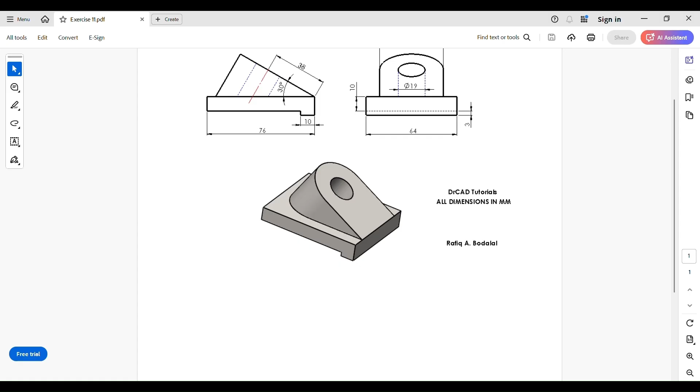We start by creating a new SolidWorks part. We copy exercise number 11 into SolidWorks, and we set the background to plain white.

The image shows the isometric view, a front view, and a side view of exercise number 11. The easiest way to model this component is in 3 main steps. Step 1 is to sketch the profile of the base, then use the extruded boss base feature to create the thickness of the base component.

Step 2, and this is the tricky part, is to sketch this slanted surface. To do that, we need to create a new SolidWorks drawing plane that is independent of the 3 drawing planes we get whenever we initiate a new SolidWorks component - the front plane, top plane, and right plane. So in this tutorial, we're going to learn how to create a new SolidWorks drawing plane.

Finally, step 3 is to create this hole. Of course, we're going to use the extrude cut feature for that.

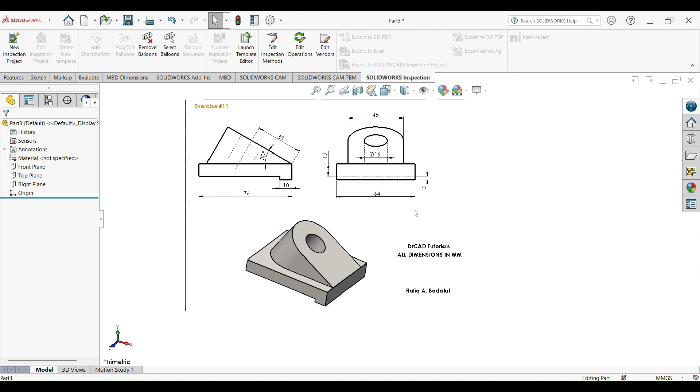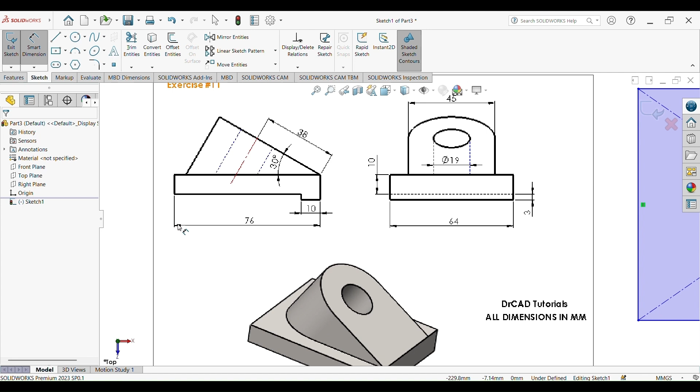So let's get started. We select top plane, sketch, and start by sketching the base profile. We go to center rectangle and draw one rectangle. We go to Smart Dimension - looking at the figure, the rectangle should be 76 millimeters long and 64 millimeters wide. So this side is 76 millimeters, while this side is 64 millimeters.

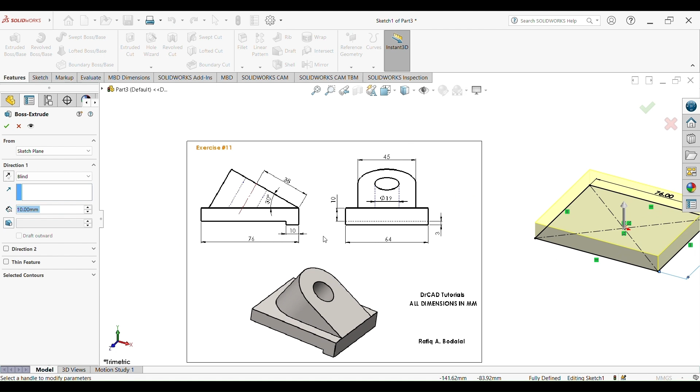Go to Features, Extruded Boss Base, and we extrude this to a height of 10 millimeters. This base should have a thickness or height of 10 millimeters. Select OK.

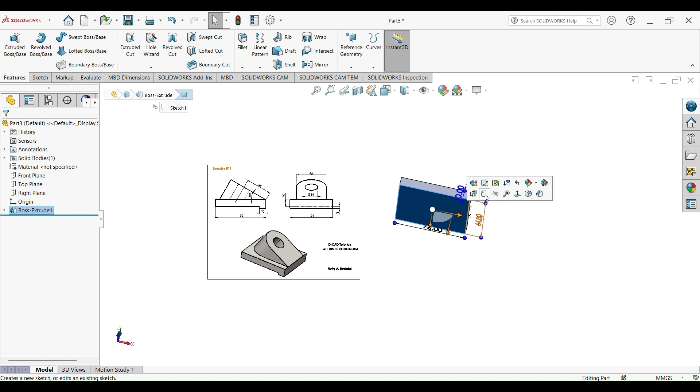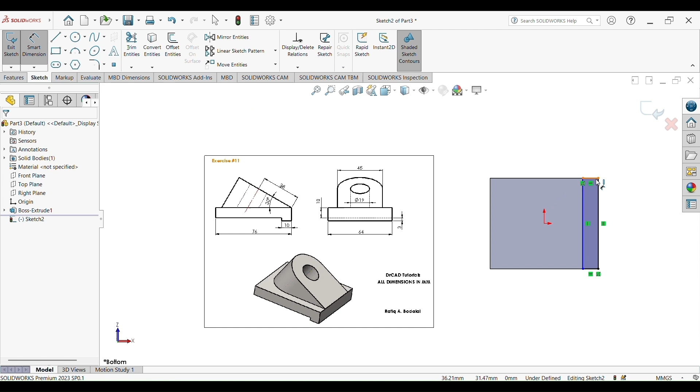Now we're going to work on this stepped edge. Select the bottom surface, sketch, go to corner rectangle, and draw one corner rectangle. Looking at the figure, this rectangle has a width of 10 millimeters. Go to Smart Dimensions, and this edge should have a thickness of 10 millimeters. Now go to Features, Extruded Boss Base, and extrude this to a thickness of 3 millimeters.

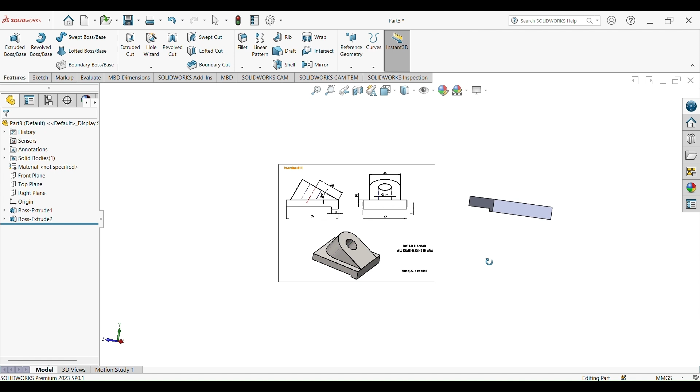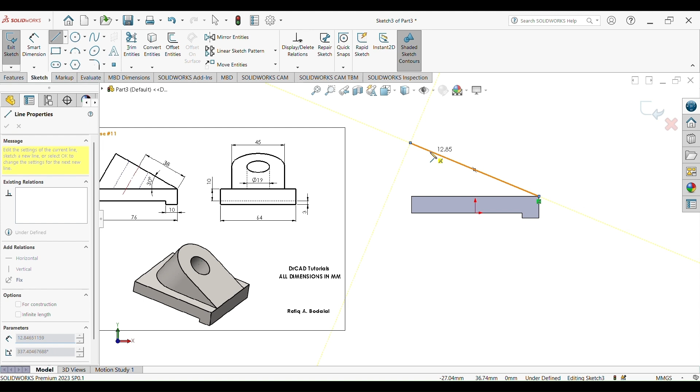Step 1 completed. Step 2, and this is again the tricky part - we need to sketch this slanted profile. Select this surface, sketch, go to Line, and draw one slanted line. Smart Dimension - the angle between this slanted surface and the horizontal surface, looking at the figure, is 30 degrees. So the angle here should be 30 degrees.

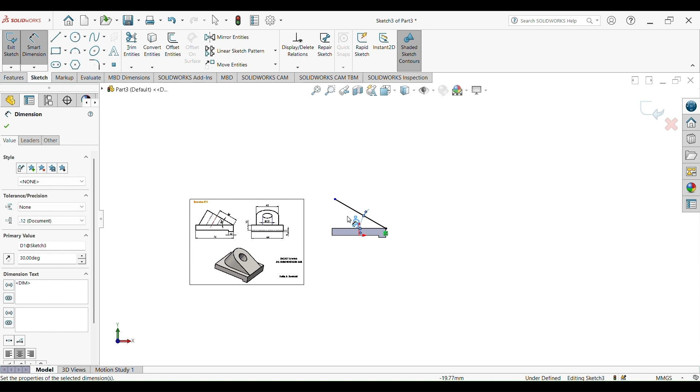Exit sketch. Now perform the same procedure on the opposite side. Select the surface, sketch, and draw one line. Exit sketch.

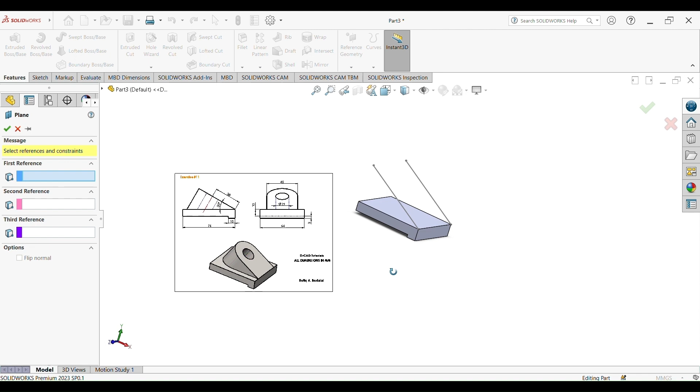Now go to Reference Geometry and select Plane. We're going to create a new drawing plane. If you look at the dialog box, you need at least 2 reference edges or points - 2 references in order to create your new drawing plane. In our case, our first reference is this line, and our second reference is this line right here. Select OK, and let's hide these 2 lines.

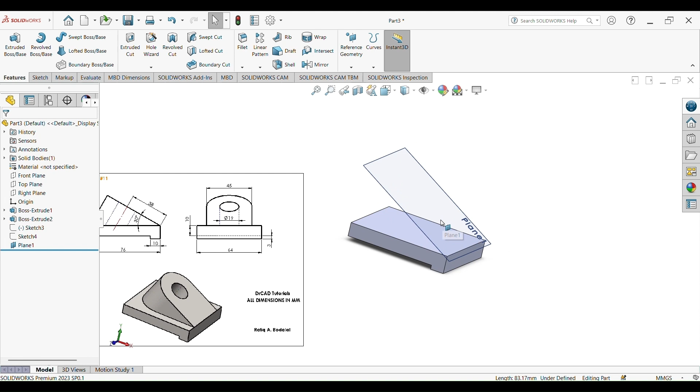Now we have a drawing plane that is slanted at an angle of 30 degrees with respect to this horizontal surface. So select this surface, sketch.

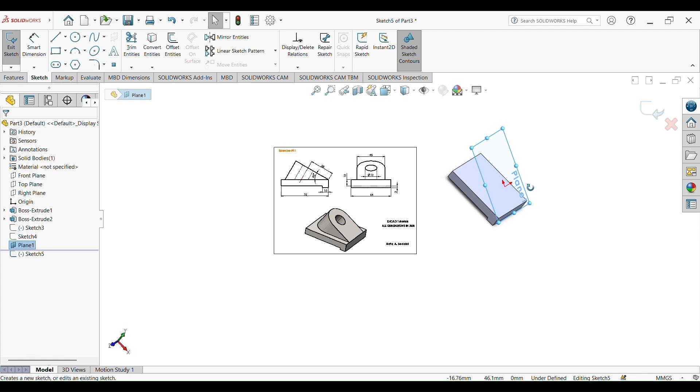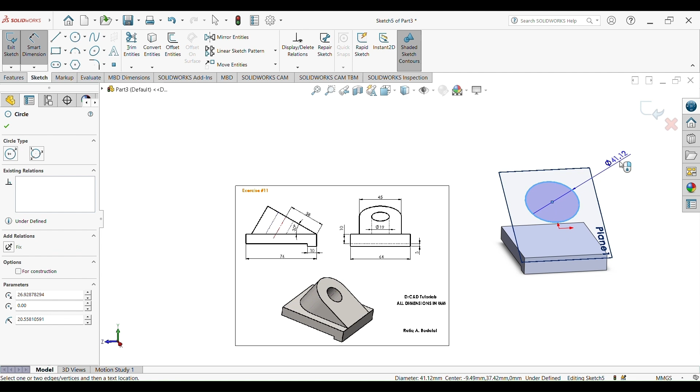Now we're going to start sketching this profile. Go to circle and draw one circle. Looking at the figure, this larger circle has a diameter of 45 millimeters. So go to Smart Dimensions and assign a diameter of 45 millimeters. The distance between the center of this circle and this edge, looking at the schematic, is 38 millimeters.

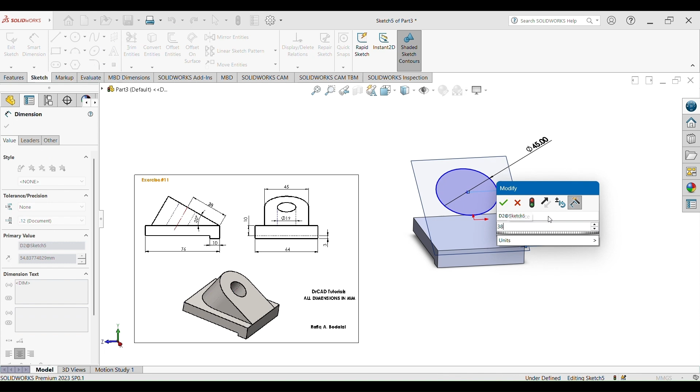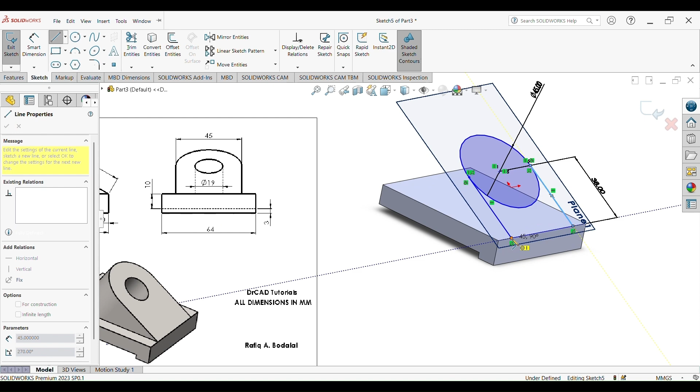Now we need to close this sketch using the line tool. So select line and begin drawing the closed figure. Go to Trim Entities, and we're going to trim this circular edge. Select OK.

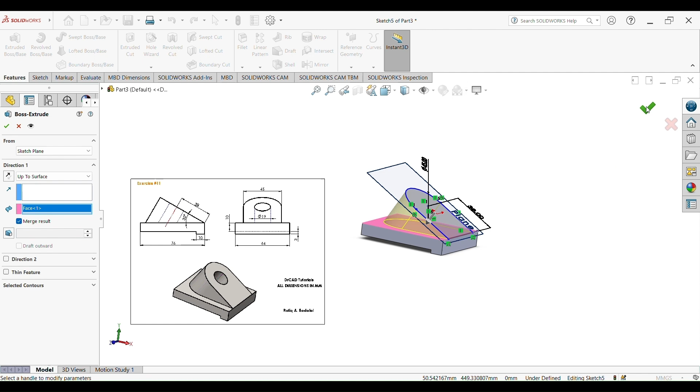Now go to Features, Extruded Boss Base, and we're going to extrude this up to surface - which surface? This surface right here. Select OK. Now hide this drawing plane. You see, we've successfully created this slanted surface.

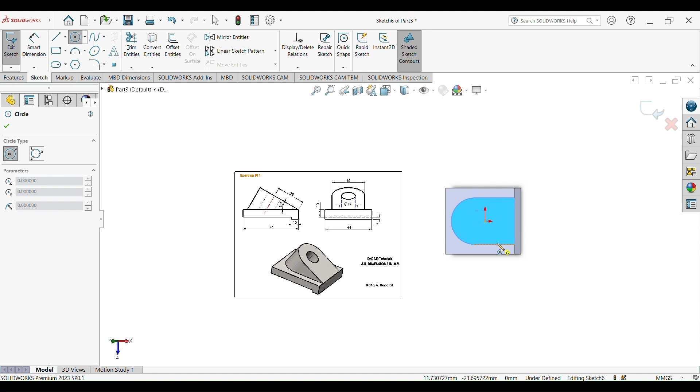Finally, we're going to work on this hole. Select this surface, sketch, select circle, and draw one circle using the center of the larger circle we created earlier. Smart Dimension - the diameter of this hole is 19 millimeters. So this circle has a diameter of 19 millimeters.

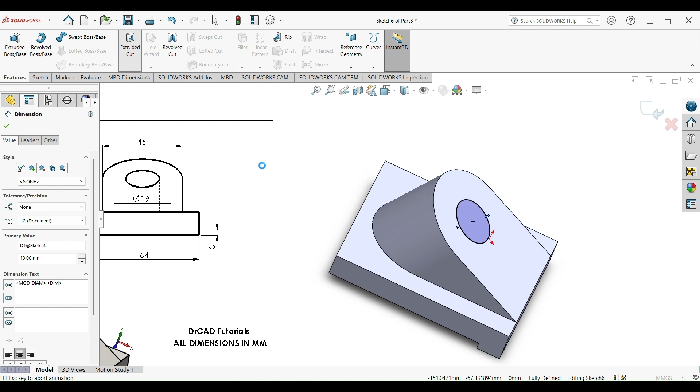Go to Features, Extruded Cut, and we're going to cut this all the way to the surface, because if we look at the figure, we see that the hole goes all the way and stops at the surface. So we select this surface.

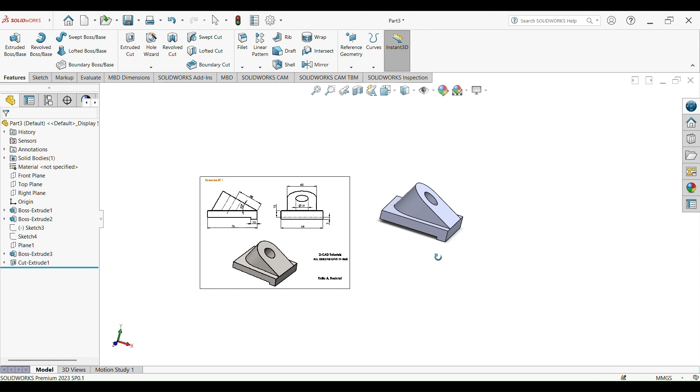We delete this image, assign a material - metal - and let's go with steel. We're going to use brushed steel. It gives it a nice color.